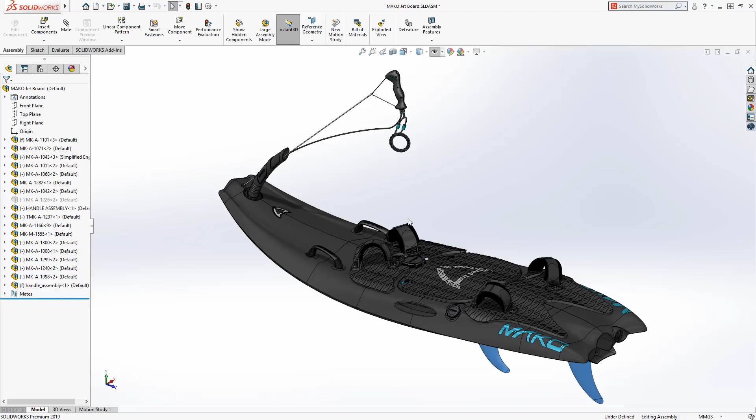Complex shapes are widespread in today's world and are often produced using industrial design tools or carved to make physical models, but they need to be manufactured. A common workflow to complete the engineering process is to leverage these designs from mesh or scanned data. SolidWorks 2019 provides several new tools to help leverage this data to create production parts, and some handy new part modeling tools that are sure to delight.

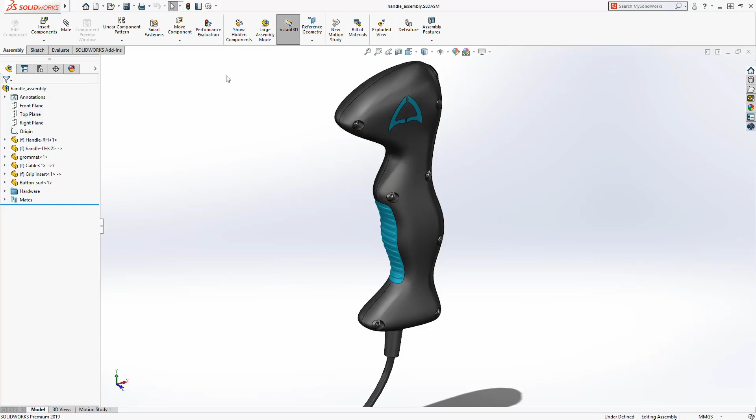This handle originated as mesh data. Let's take a look at how it was built. SolidWorks can open a wide variety of mesh data like this 3MF file. As you can see, this is clearly a mesh body, and to leverage this body to build a solid model, a new slicing tool is available to create intersection sketches through the mesh body.

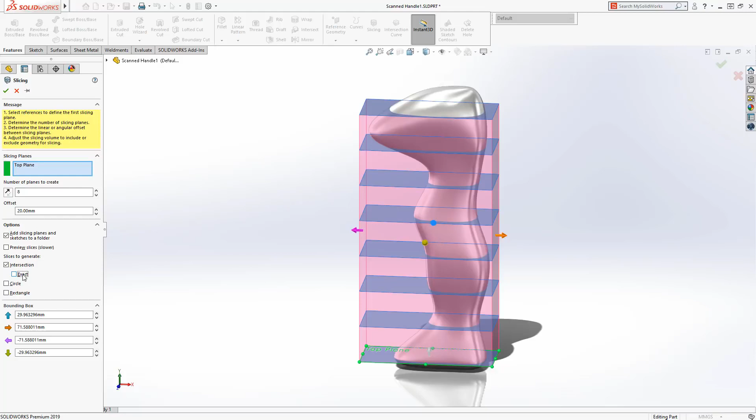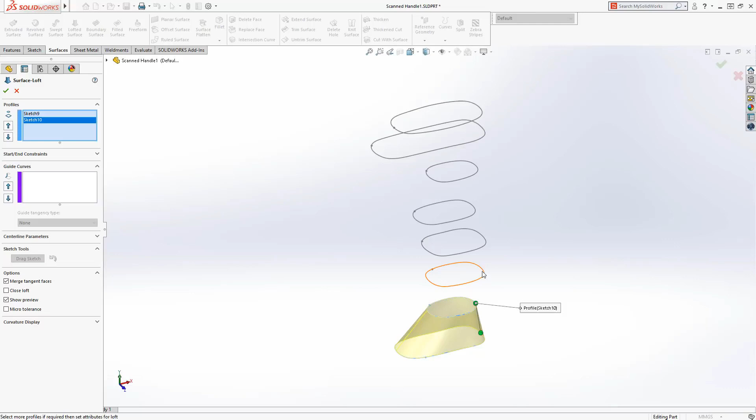Pick a starting plane, then define the number of planes and offset. The slicing planes and sketches are organized in a folder and can be edited to position the sketches in the desired locations. Once positioned to your liking, the mesh body can be hidden. These sketches can be used like any other sketch to create a solid body. For this example, a surface loft will be created to define the shape of the handle. The new slicing tool allows users to easily repurpose mesh data to create solid models.

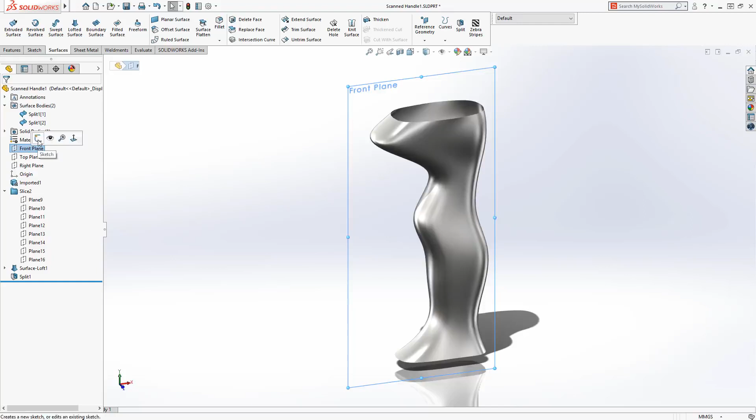This handle will be designed into two halves, so to continue the design workflow, the split command can be used to create two bodies split at the central plane. A logo needs to be applied on each of the halves, so a sketch will be created and a sketch block will be applied and positioned from the design library.

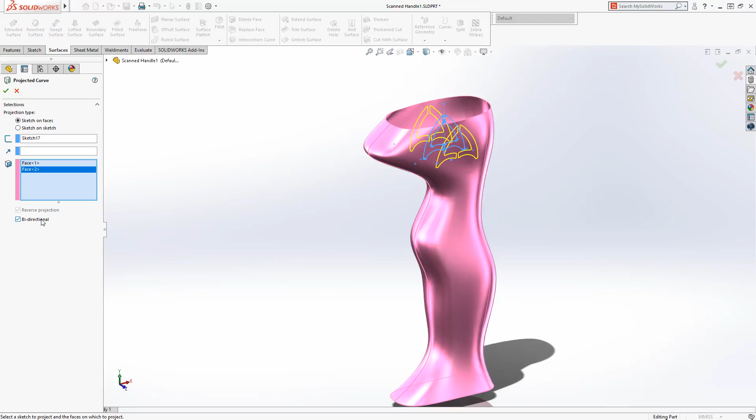To apply the logo, we'll use the Projected Curve command. In SolidWorks 2019, projected curves now support multiple open or closed contours, can be projected onto multiple bodies, and a new bidirectional option is available to project in both directions. The logo is then created in a single feature. Previously, this would have taken 2 sketches and 4 projected curves.

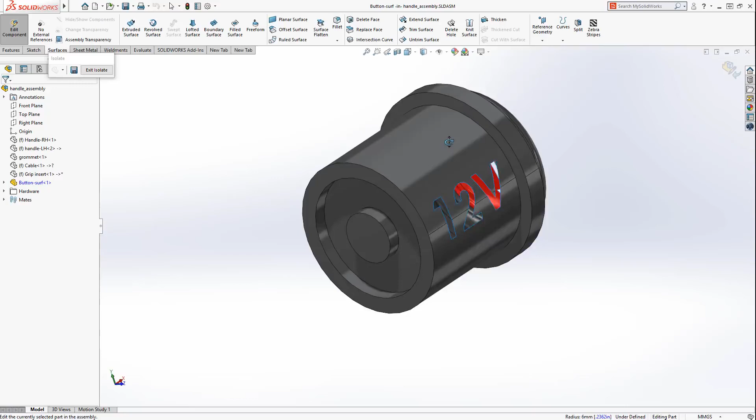As the design progresses, let's take a look at another enhancement for working with surfaces. The power button is a surface model that contains several holes that need to be removed. Previously, these holes could be removed by selecting the edges of the hole and hitting the delete key, but this method was not easily discoverable. Now in SolidWorks 2019, a delete hole button is available, as well as a property manager for editing. The holes are removed and the surface is now watertight.

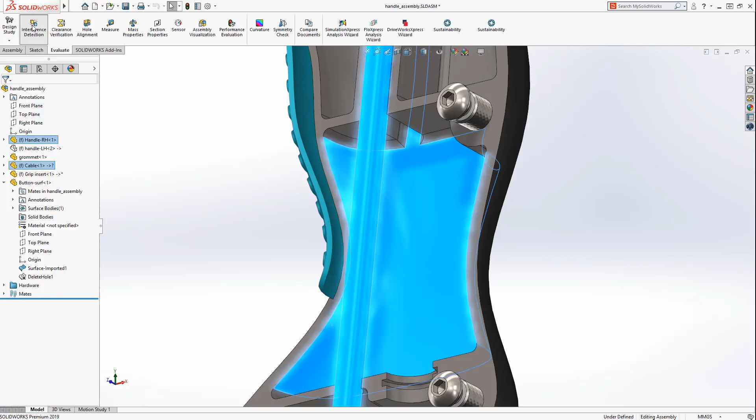As we look over the assembly, an interference is suspected between the cable and the handle part. A quick interference detection confirms our suspicion. To address this interference, the new partial chamfer tool in SolidWorks 2019 will be used. Now, the length of fillets and chamfers can be controlled. There are various options available to control the start and end offset, or the on-screen handles can be dragged to locate the ends of the chamfer. Asymmetric fillets and chamfers are supported as well. This new capability will save time and will reduce the number of features.

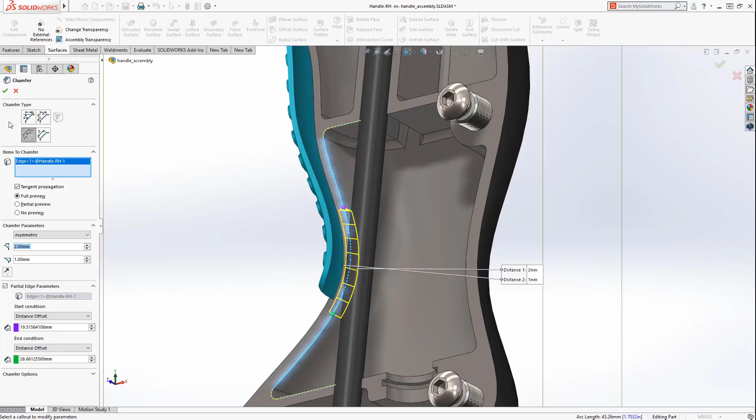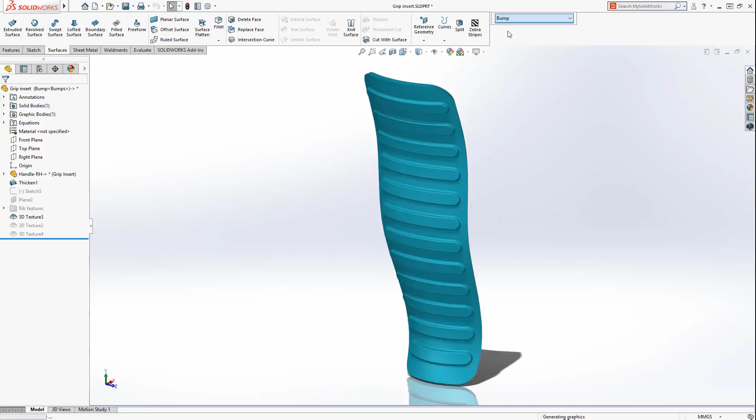Some designs, such as this grip, require textures or bumps which can be functional or just for aesthetic purposes. These textures can be time-consuming to model and require many features, such as these ribs. SolidWorks 2019 introduces a new 3D texture tool which leverages an image to define a pattern of bumps. Here, several variations have been created using this new tool, including a logo.

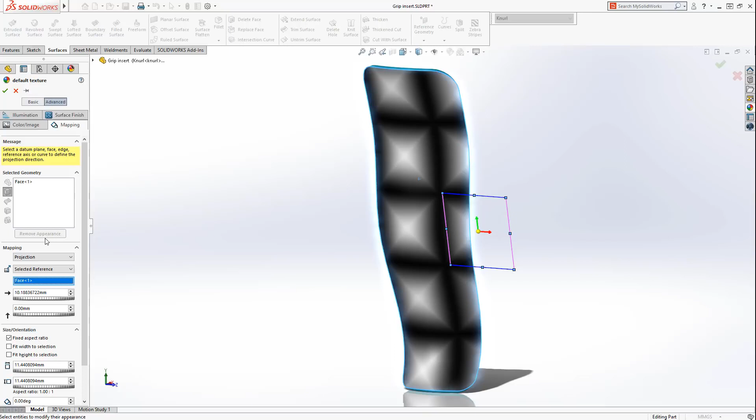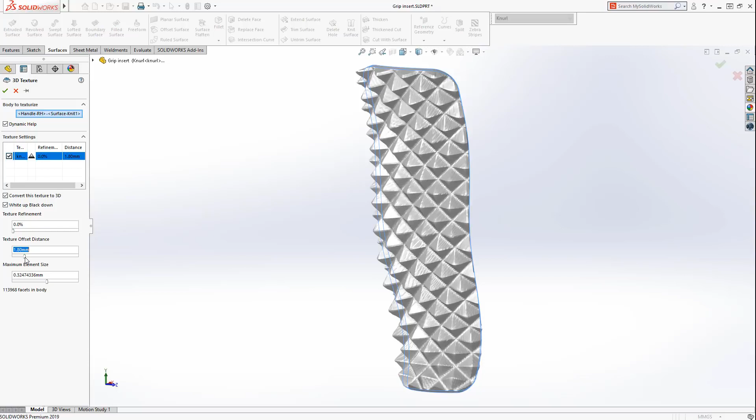These 3D textures are created by applying an appearance to a part or face, then size and orient it as required. The new 3D texture command can be used to turn that appearance into 3D geometry. The lighter the color in the appearance, the farther the offset from the base face, and there are controls for mesh size and offset. SolidWorks then creates a mesh body that is ready for downstream processing or 3D printing.

These are just a few of the enhancements for SolidWorks 2019. These new tools will help to streamline the workflow when working with mesh data and save steps when working with part models.